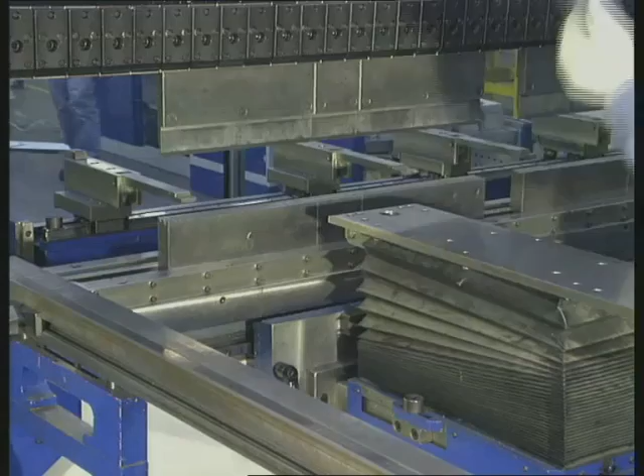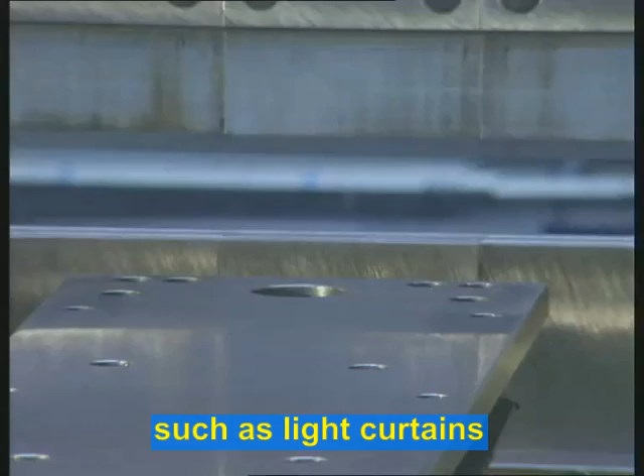Press brakes present a serious risk of injury. Especially in the easily accessible bending area of the machine, there is considerable risk of injury to fingers and hands. Standard safety interlocks are often bypassed as they restrict the exact guidance of the material to be bent or reduce the productivity of the workers or the machines.

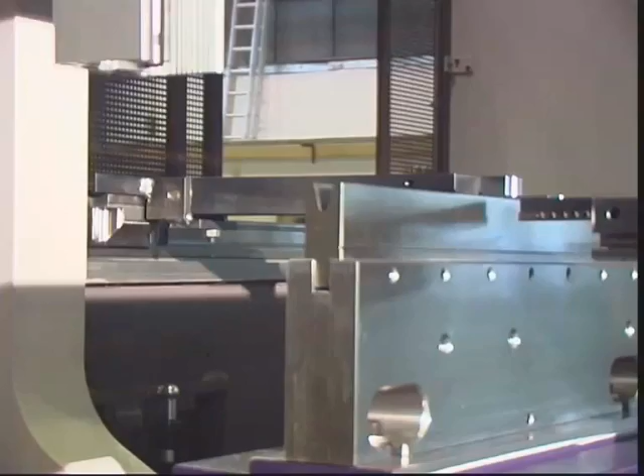For this reason, in 1998, Fiessler Elektronik developed their innovative AKAS safety system. This system reliably prevents accidents without delaying work or lowering the productivity. Using the AKAS system, even small parts can be accurately guided by the hand or the fingertips throughout the whole bending process.

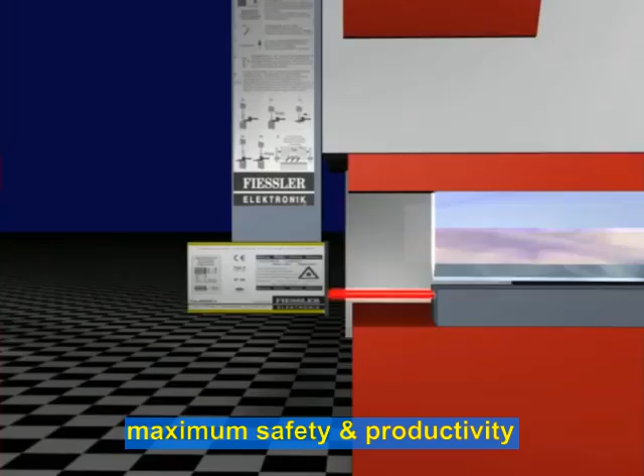The AKAS press brake safety system, now in its second generation, allows even faster cycle times and thereby maximizes both safety and productivity. The AKAS press brake protection system is patented, EC approved, and has been examined by the German TÜV to ensure that the safety measures are applied in practice.

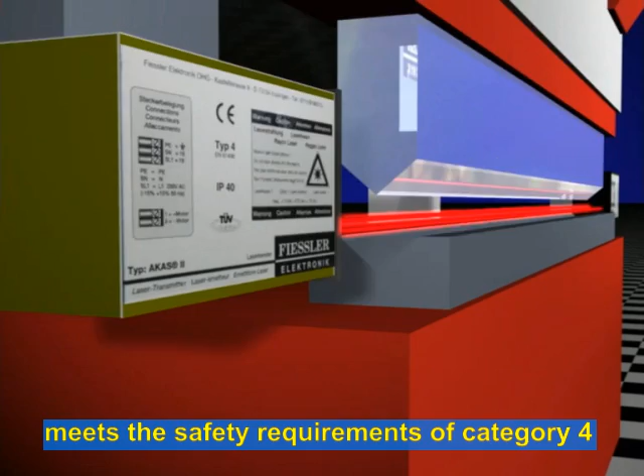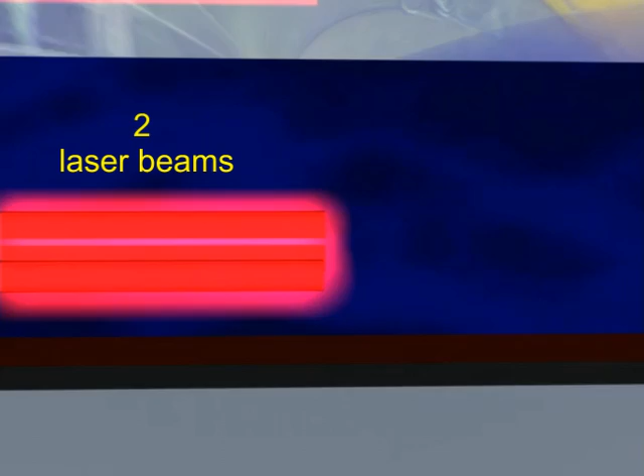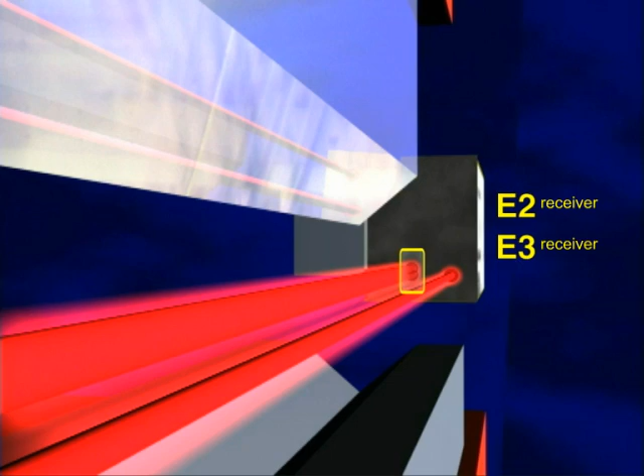AKAS consists of a transmitter and a receiver. The AKAS transmitter generates two red light laser beams, which due to the positioning of the receiver elements form a 3-beam safety grid. The vertical laser grid is received and analysed by elements E2 and E3. Additionally, the element E1 provides horizontal protection during the phase where the machine is being closed.

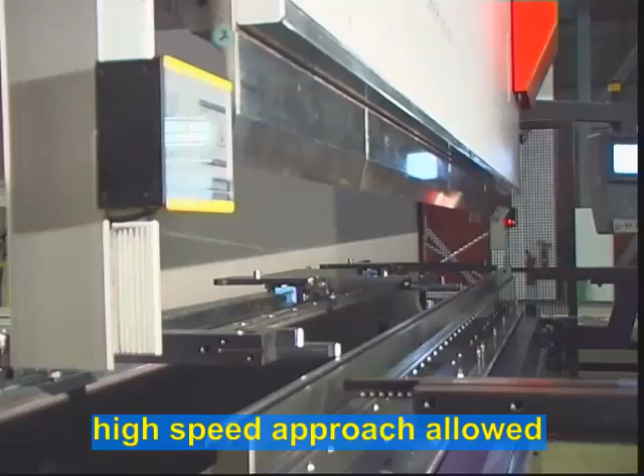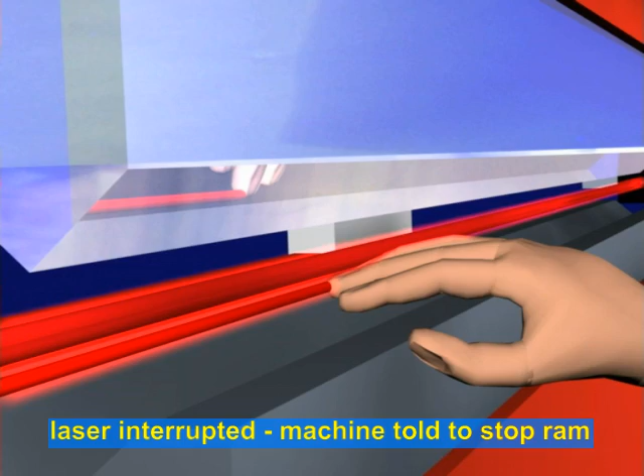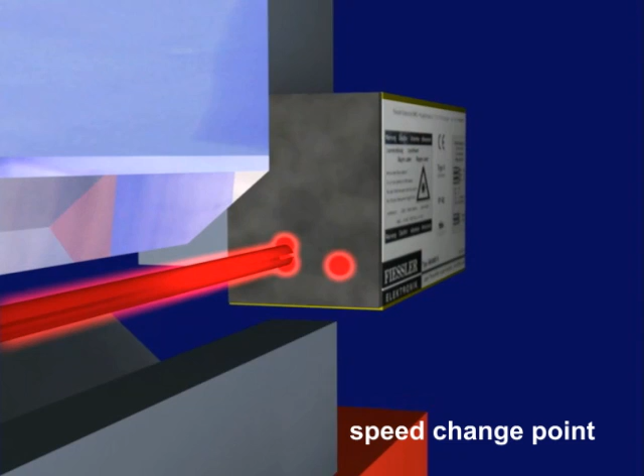During the actual bending process, the punch moves down at high speed, that is, at full speed, until the tip of the tool is positioned immediately above the metal sheet. The presence of a finger or hand in the danger area would be detected by the laser grid and stop the machine. If, however, there is no danger, then the descent of the tool will be slowed to the normal working speed. At this changeover point, two receiver elements will be muted, that is, bridged, so that even though the laser beams are interrupted, the machine will not be stopped.

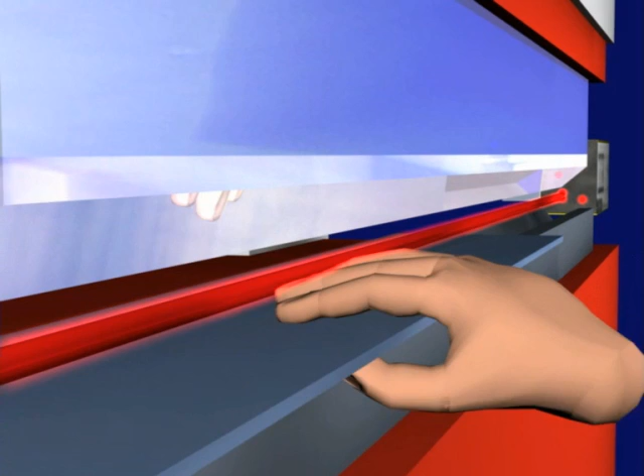Nevertheless, if for example a finger enters the danger area, the third receiver is still active and will stop the machine. The third element will only be bridged when the gap between the tool and the metal sheet has reduced to a few millimeters and is no longer a danger to hands or fingers, and the sheet can be safely bent.

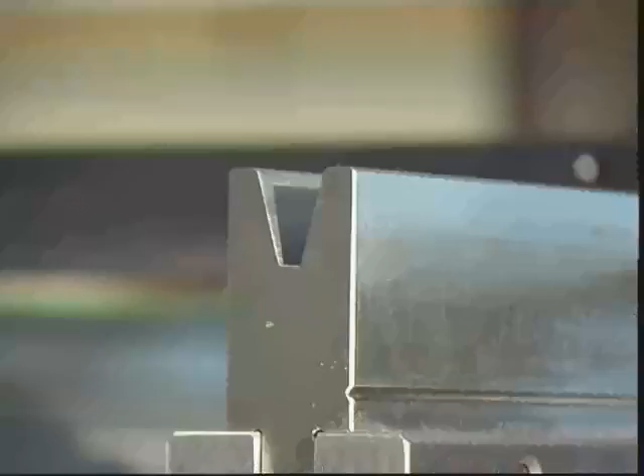The changeover point from high to low speed may differ according to the individual parameters of each machine, especially as the braking of the punch on the newer press brakes has been considerably improved. This means considerably reduced overhead times, which can be converted into increased productivity by the use of the AKAS-2.

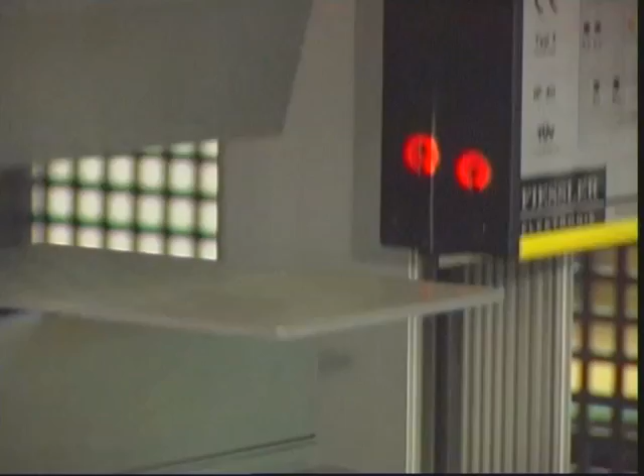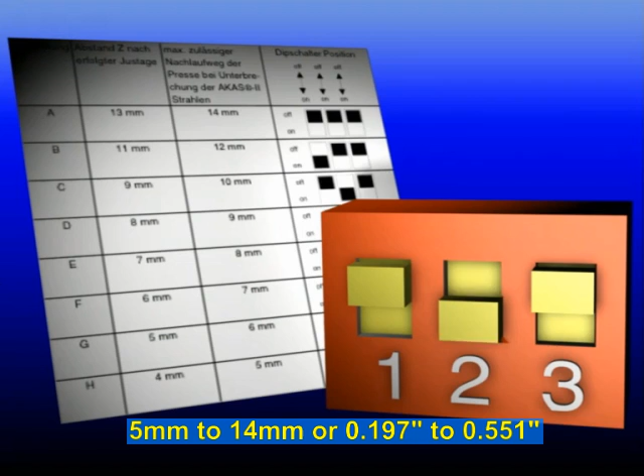There are 8 different adjustment codes available with the AKAS-2 to suit traverses between 5 and 14 millimeters. The code is simply fed into the AKAS-2 via 3 simple dip switches, and this allows each individual machine to remain in the high-speed mode for the longest possible period of time. The result? Optimized performance without compromising safety.

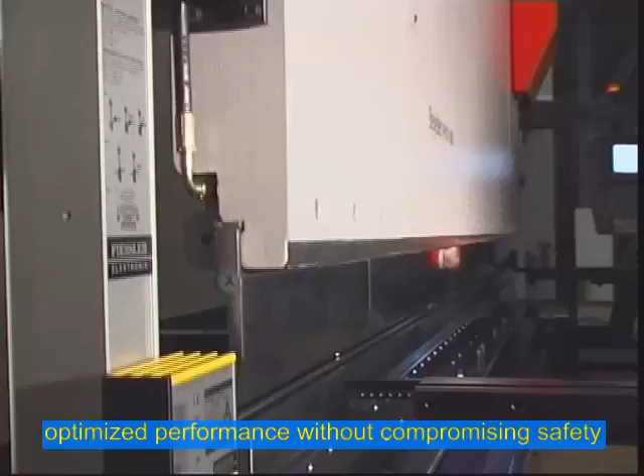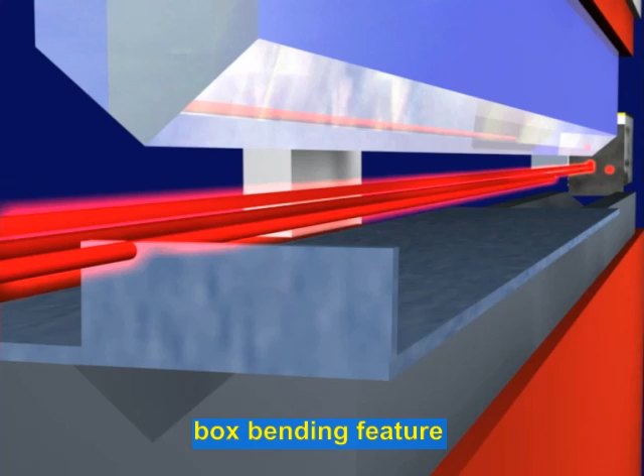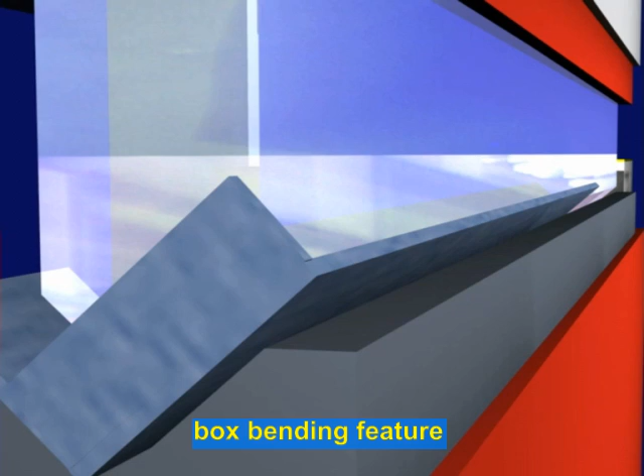As with all AKAS safety systems, the AKAS-2 allows a box bending function without costly breaks at each stage. To carry out the box bending function, the receiver element E1 must be switched off. Otherwise it would be blocked by the part of the metal box which has been bent upwards. The other receiver elements are not influenced by the metal sheet as they are placed just behind and close to the bending line, and so continue to provide reliable protection for the operator's hands and fingers.

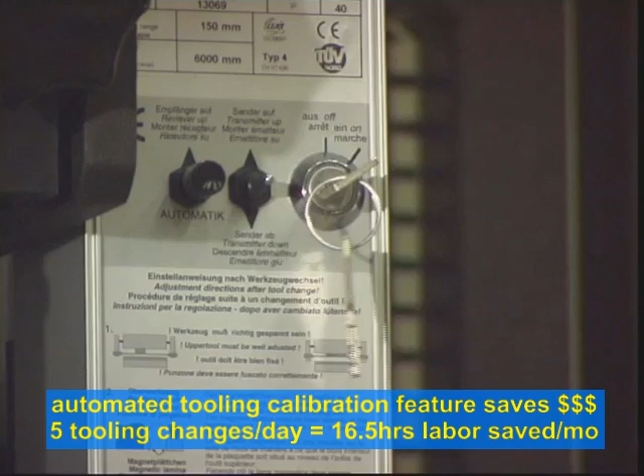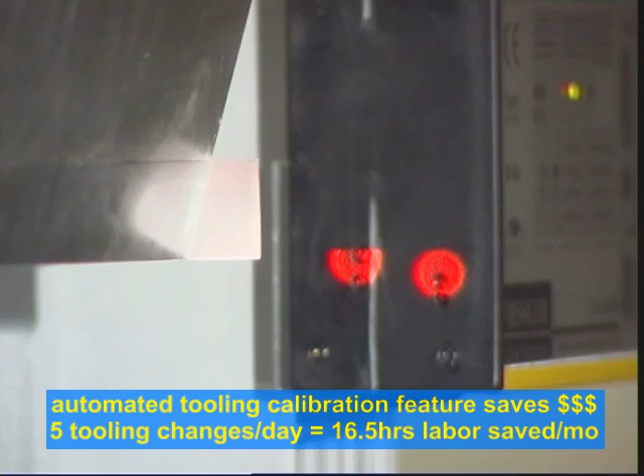If, for example, during a tool change, a high punching tool is exchanged for a smaller one, then the AKAS-2 will automatically adjust to the new tool. This saves manufacturing time and removes the chance of human error. The time which would have been necessary to adjust the AKAS-2 can be used for carrying out other tasks. This is possible because the values for overrun, traverse and other safety features have already been entered into the system.

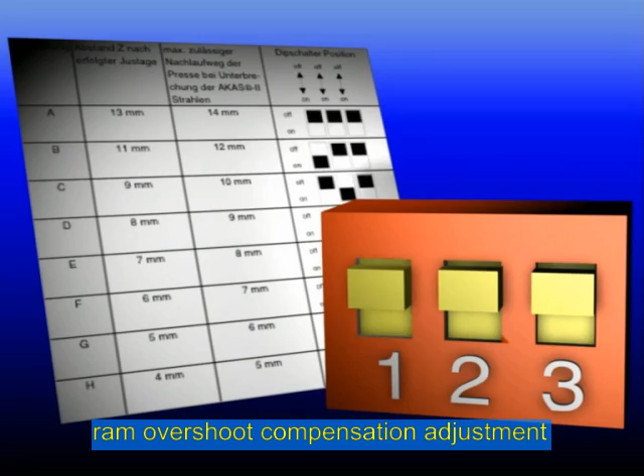Of course, the most important requirement of a press brake is to ensure the safety of the operator. The AKAS-2 system from Fiessler Elektronik, with its easy-to-use, innovative safety laser grid, fulfills this requirement. The AKAS-2 in no way reduces the productivity of the machine. The entire work sequence of the machine is optimized with individual machine type and is carried out without any intermediate pauses. In addition, after each tool change, the AKAS-2 will self-adjust quickly and perfectly.